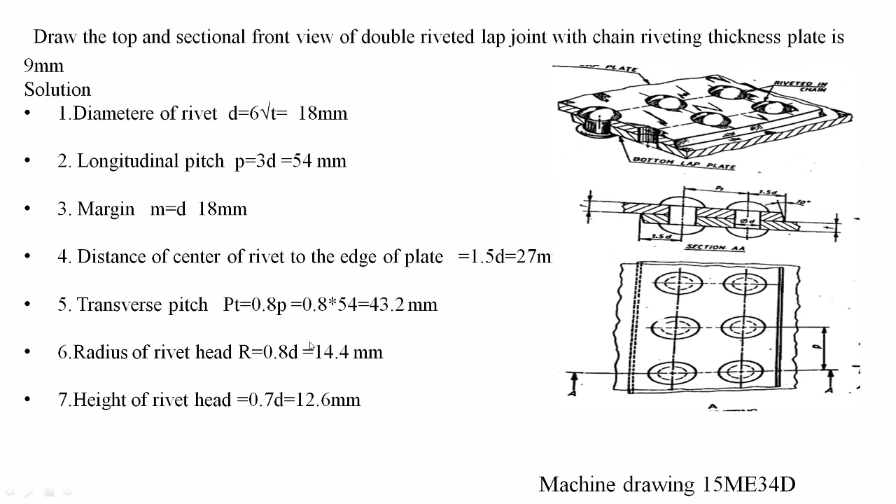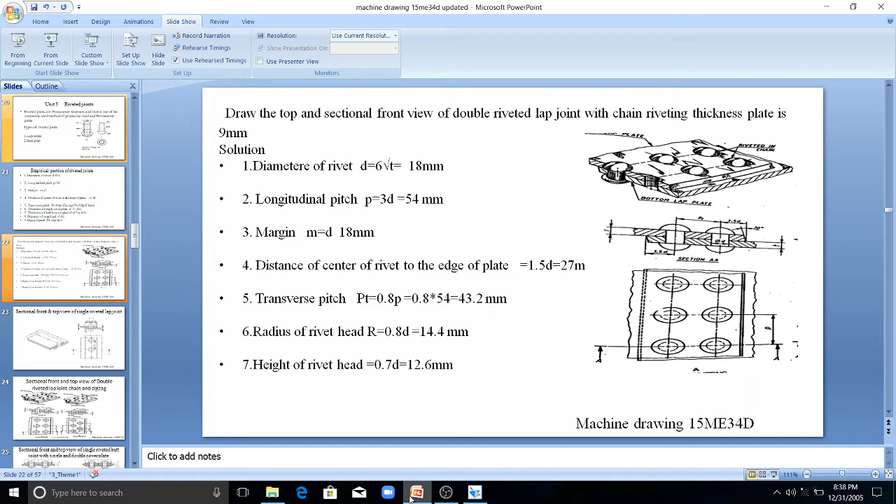So I'll start with the center line. Now I have to draw another center for the second rivet. The distance between these two centers is PT, that is 43.2 millimeters. So I have to draw the other center at a distance of 43.2 millimeter from this line.

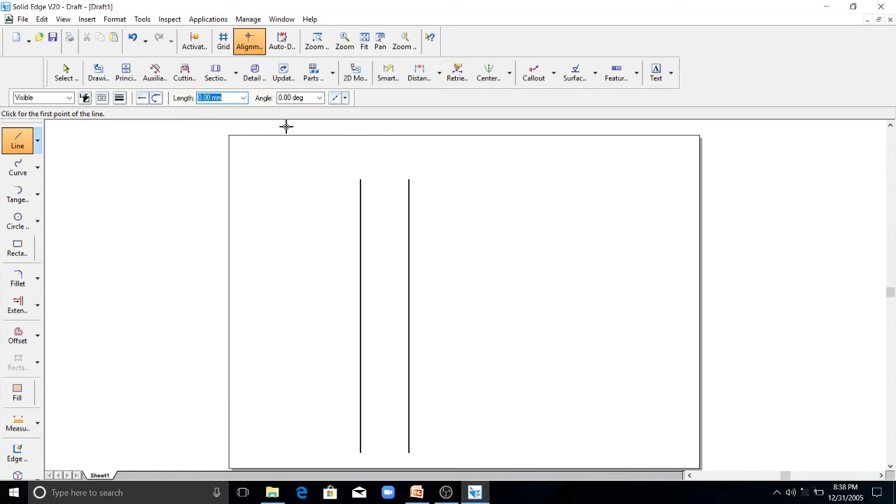Now I will draw the two plates. The thickness of the plate is given as 9 millimeter, so I have to draw two plates of thickness 9 millimeter.

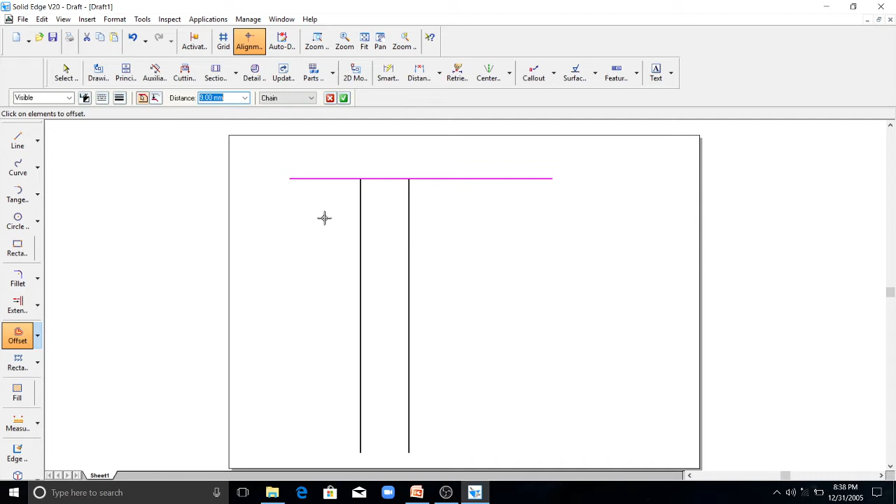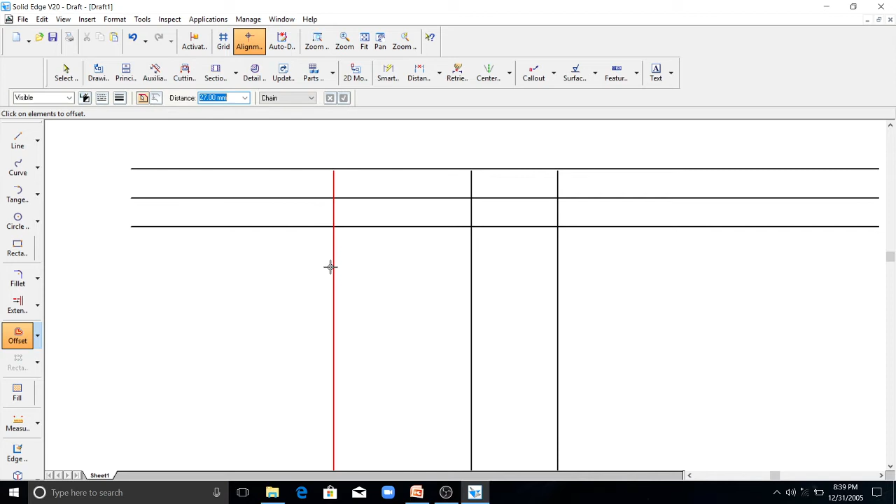Now I have to draw a distance of 1.5 D, that is 27 millimeter. This is the center distance from the center of the rivet to the edge of the plate from both sides, you can see here. So to draw a line at a distance of 1.5 D, it is 27 millimeter from this line. This side - so this is the 1.5 D distance.

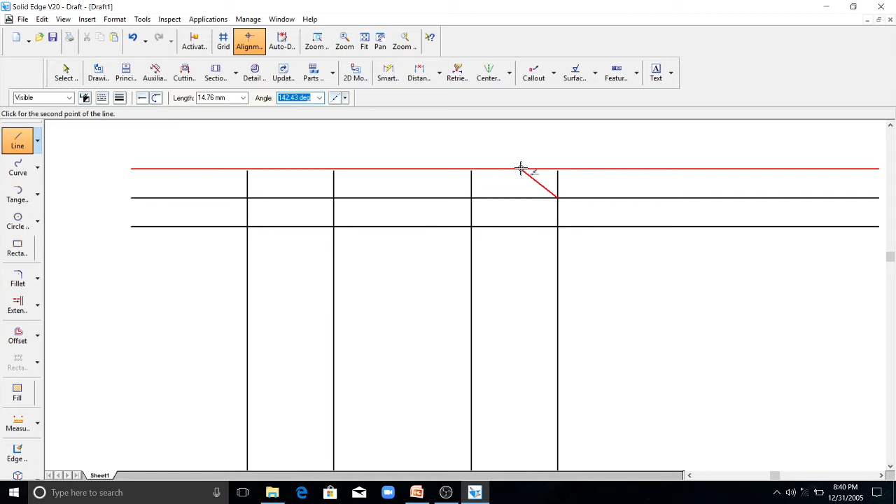Now you have to draw the 10-degree taper line. You can see here this 10-degree taper line from both sides here. So 10-degree taper here, similarly 10-degree taper on the bottom side. So the remaining portion you have to erase it.

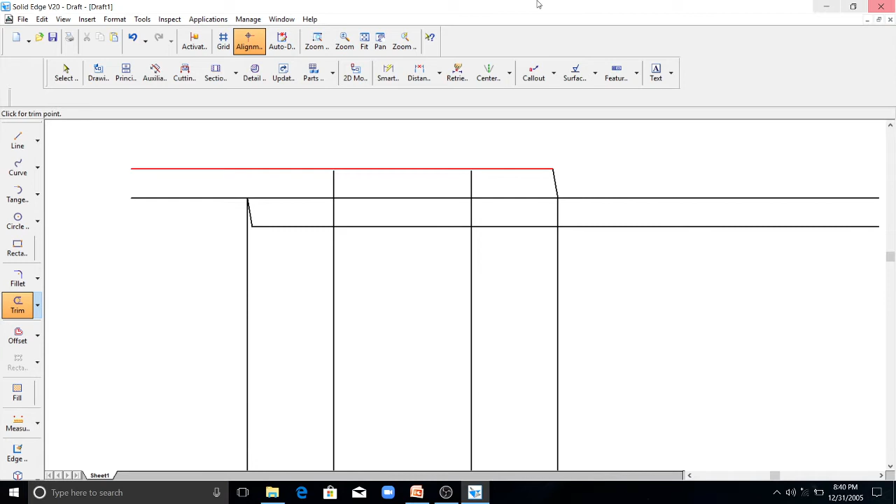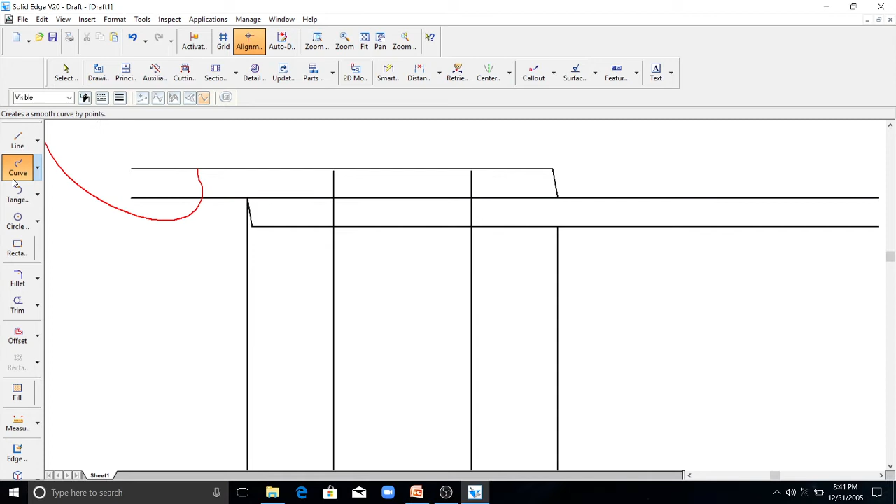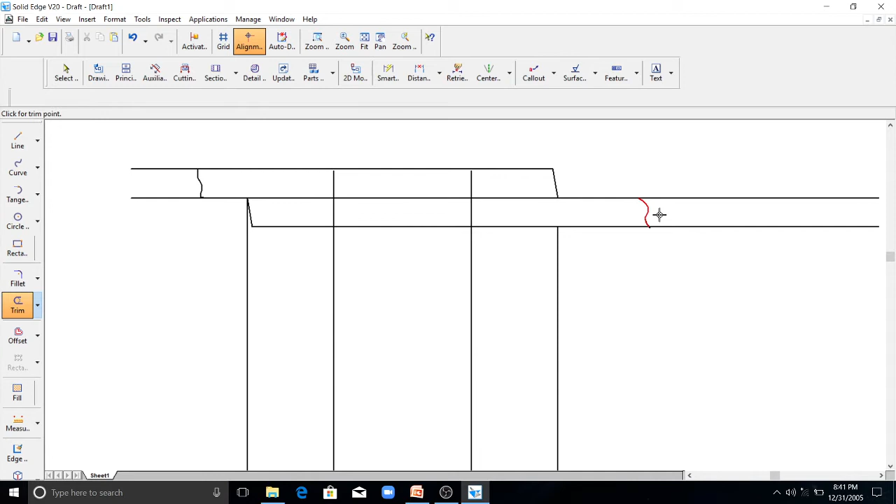This length you can draw for any dimension, it doesn't have any particular dimension. Similarly, this length also you can draw for any length. The remaining portion you erase it.

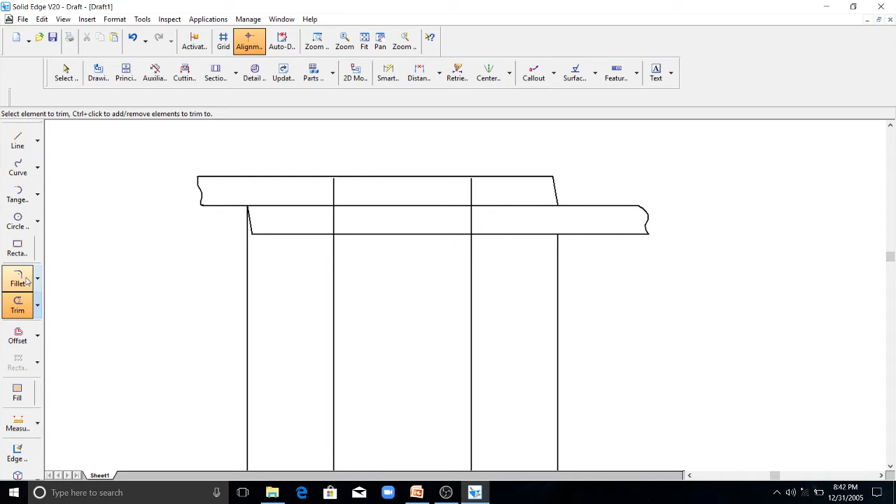Now I'll draw the diameter of the rivet, that is 18 millimeter. So 9 millimeter from the center. Similarly, here also 9 millimeter.

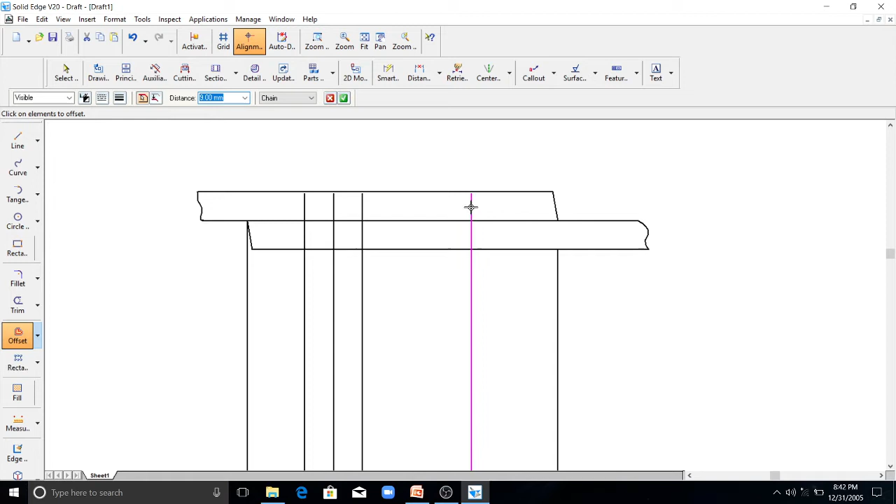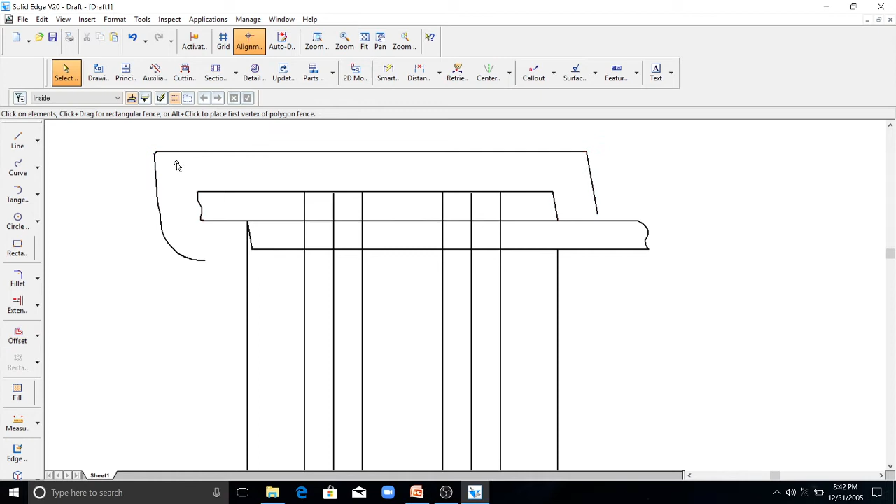Now you have to take a distance, the height of the snap head, given as 12.6 millimeter. So take a distance of 12.6 millimeter - this is the height for the snap head. Similarly you have to take the radius of the snap head, distance 14.4 millimeter. So from this center, 14.4 millimeter you have to take.

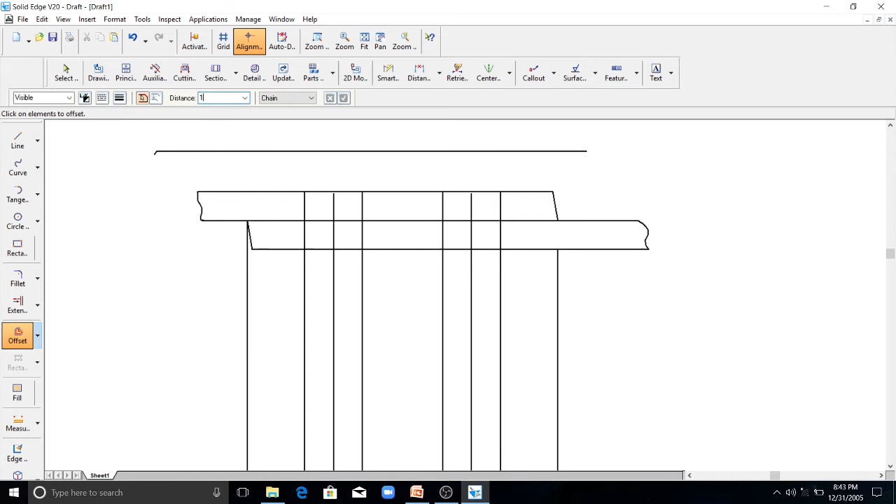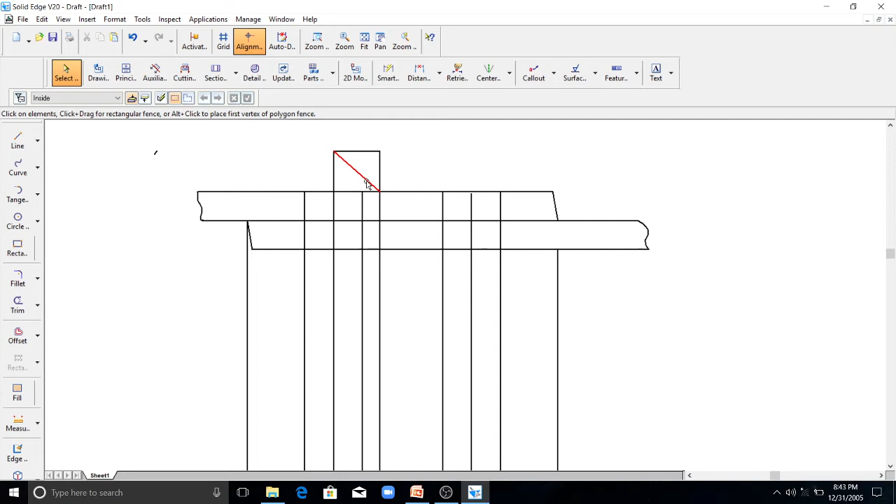Now extend this line, this center line. Now you have to draw a line from this diagonal to this diagonal. So in order to draw the diameter of the snap head, you need to bisect this line, and this bisector should extend till it touches the center of the rivet. So bisect this line first. This is the bisector of this line.

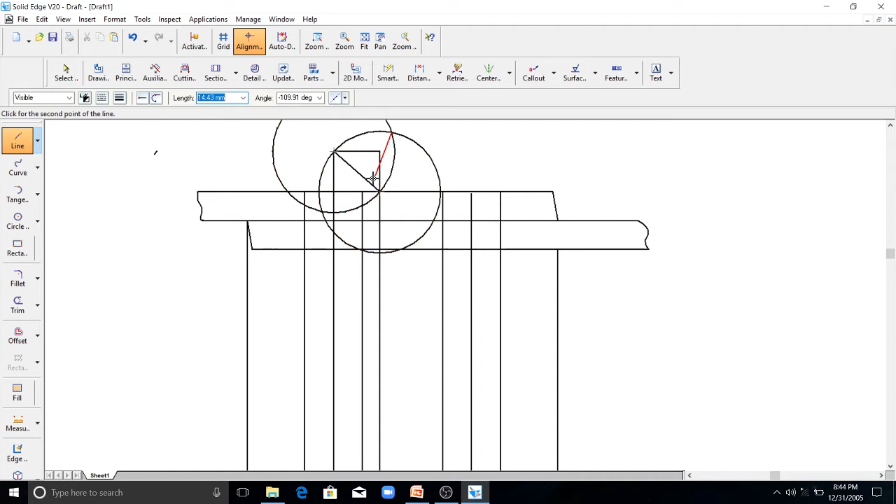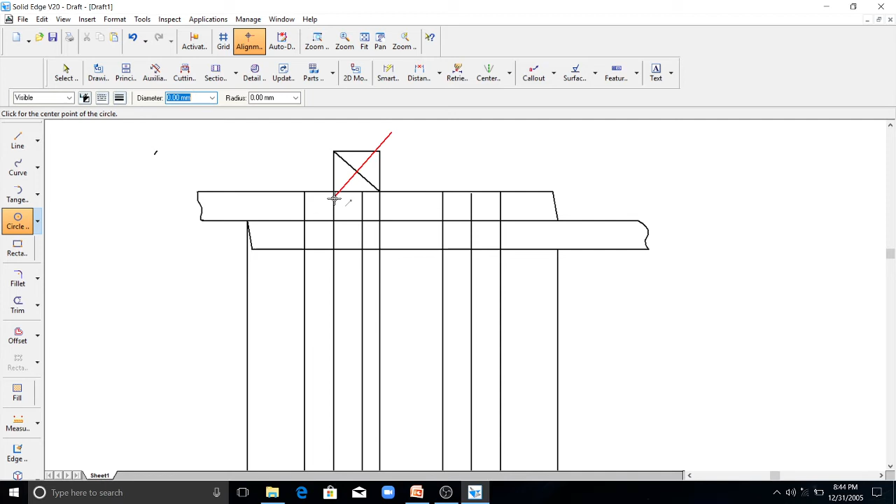So this bisector you need to extend till it touches the center of this rivet, and the remaining portion you trim it. So already it is extended - this is the center, the center to draw the diameter of the snap head, or the radius of the snap head. So from this center, draw an arc of radius equal to 14.4 millimeter.

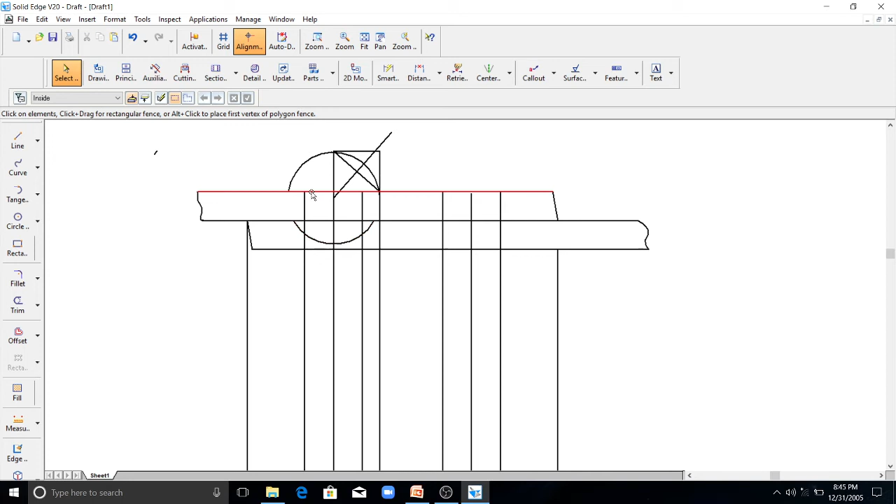So this is the procedure to draw the snap head. Similarly, you have to draw the bottom portion of the snap head. Instead of drawing these things again, you can use a simple technique: since this radius remains the same in the bottom portion, you just need a center here. For that, measure the distance from this line to this center.

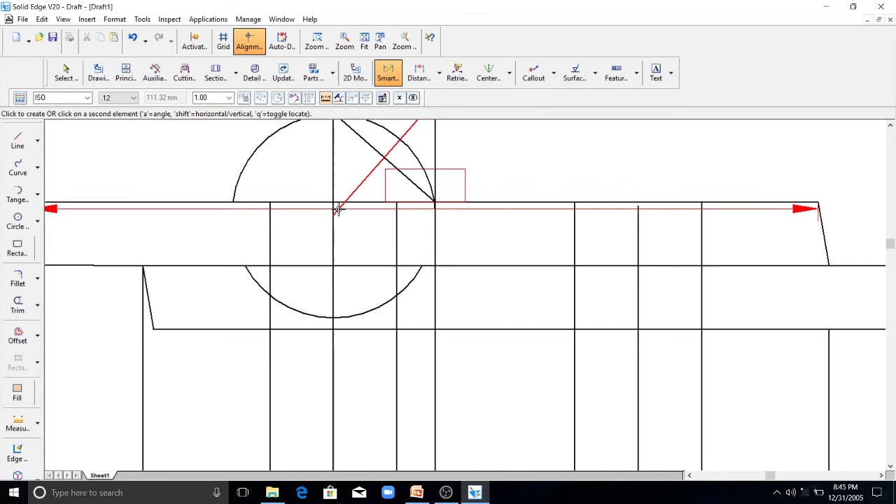Measure the vertical distance, that is 1.93, and from this center, with this line, you leave a gap of 1.93 here, so you will get a new center to draw the bottom portion of the snap head. So 1.93 mm.

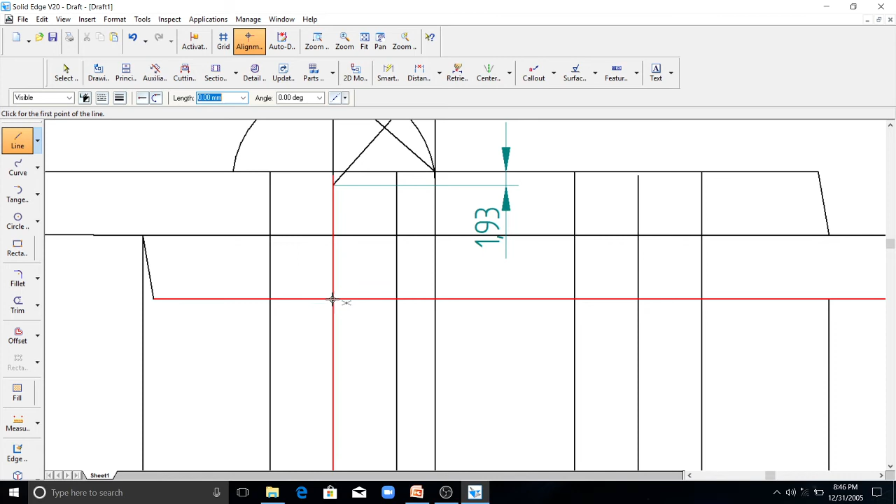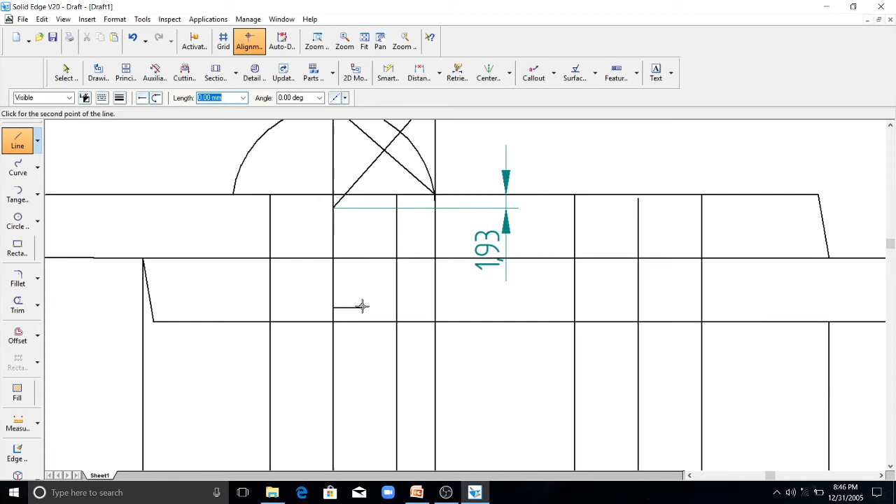So instead of drawing these things, I am telling the simple technique: just copy this distance here and leave that distance here, so you'll get a new center for drawing the bottom portion of the snap head. The radius remains same, that is 0.8d, so 1.93 from this line inside. You draw a radius arc of radius equals to 14.4 mm. So this is the procedure to draw the bottom portion.

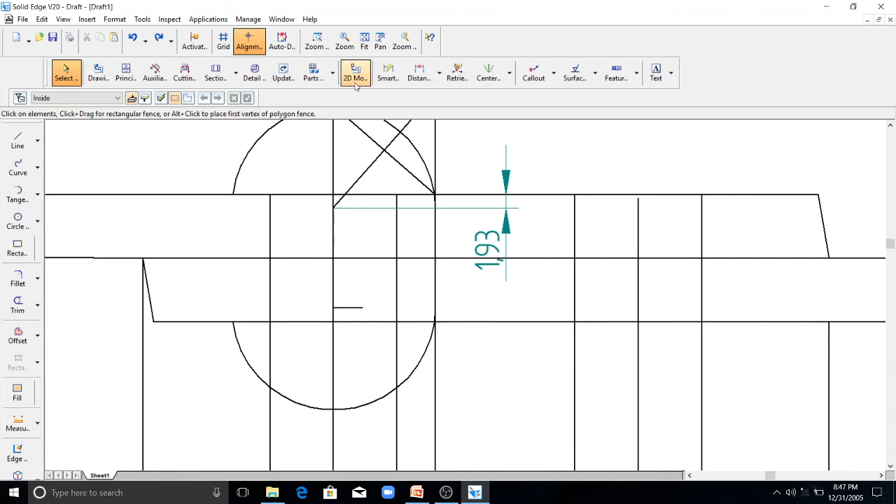Similarly, you have to draw the snap head in the second rivet. Instead of doing the same things again, you can copy this center to this line, because these two rivets are of the same dimension. Again, no need to draw these lines again and again. Just simply copy this center here to this center here, and similarly this center.

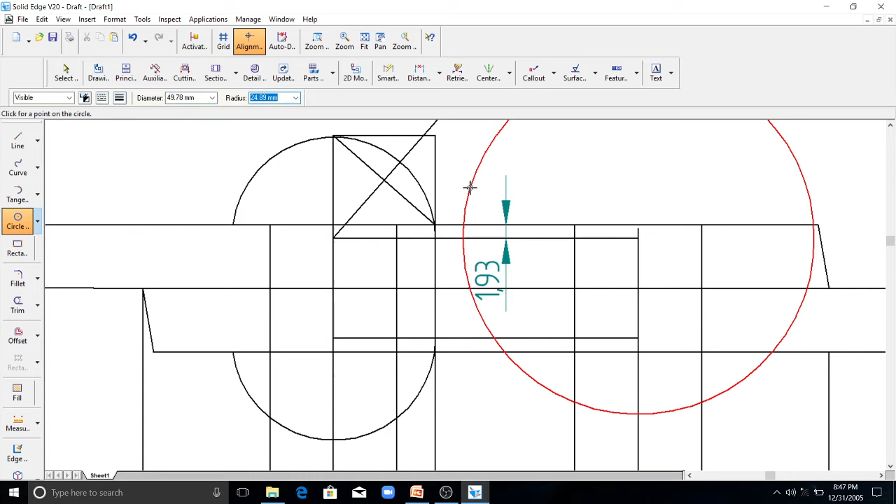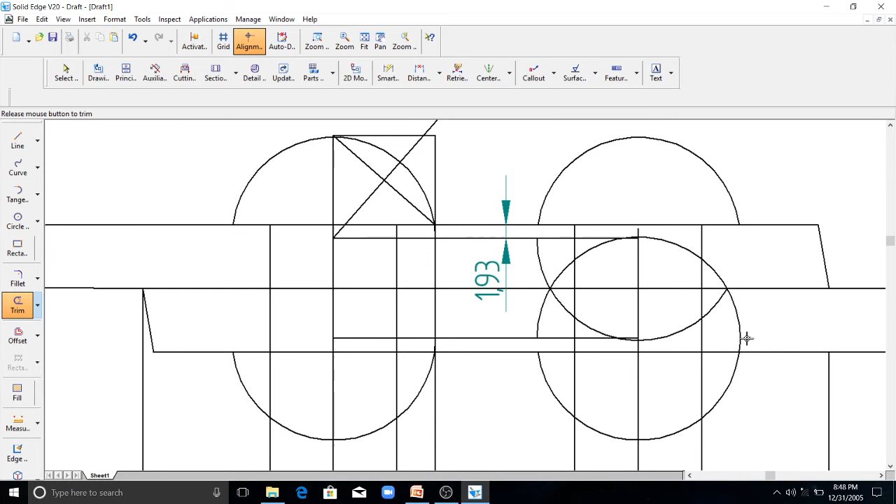Simply draw the arc of radius equals to 14.4 millimeter. Here, new center, radius equals to 14.4 millimeter. The remaining portion we erase in order to avoid confusion, so everything you erase so that there will be no confusion.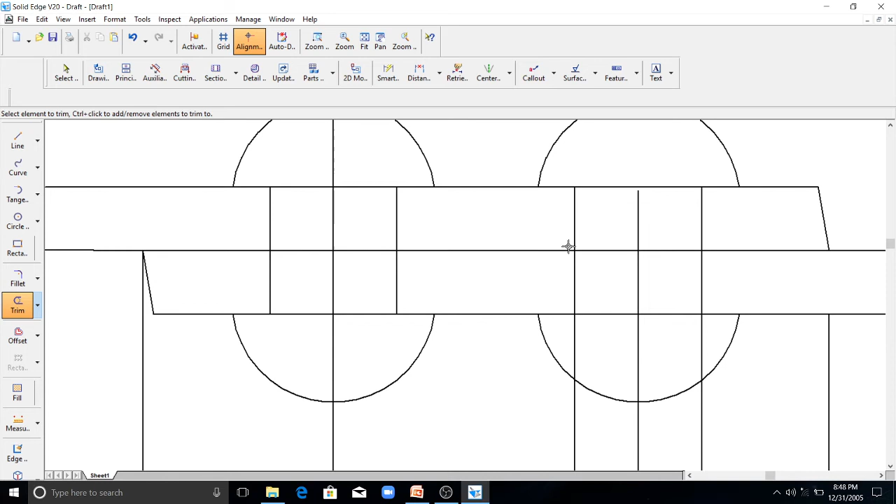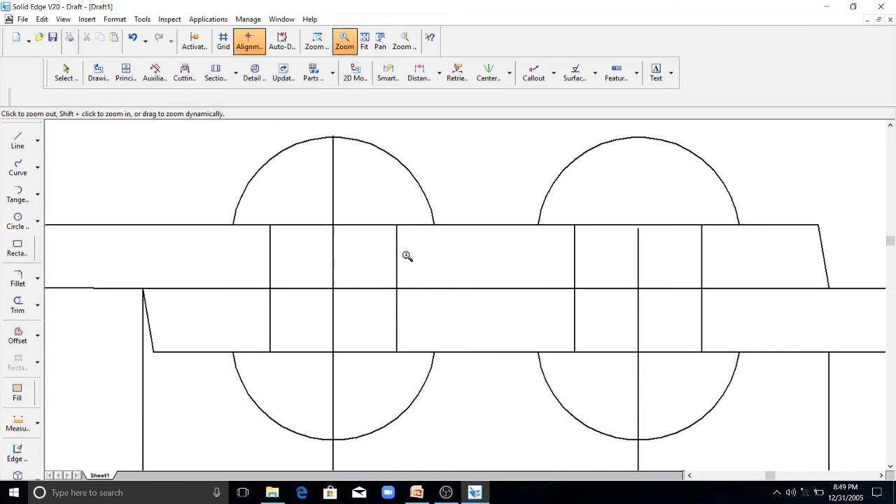How I have drawn the front view: you section it. Since there are two plates, you have to section it at a different angle. This is one plate, and the bottom plate you have to make at another angle. So these are two plates, and this completes the sectional front view.

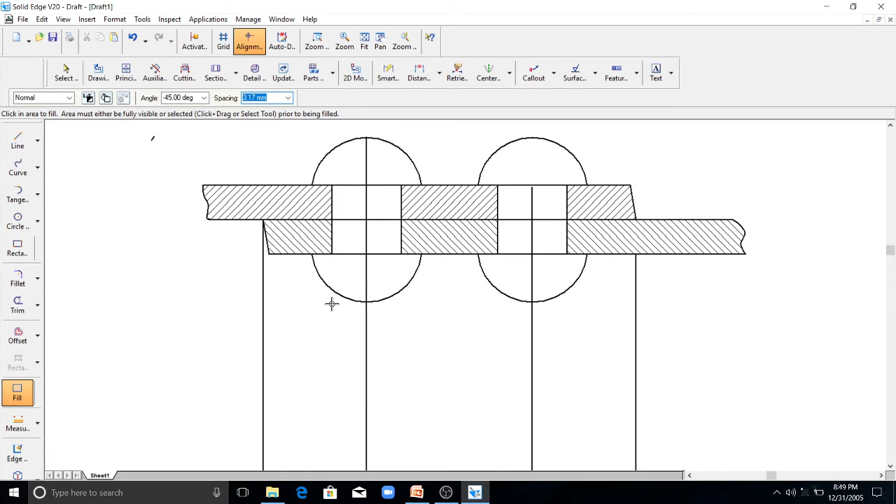Now you have to concentrate on drawing the top view. You can start the top view with any line; there is no particular distance here, so you can start anywhere. I will start with this center. In the top view, you can see the diameter of the snap head first. This diameter of the rivet you cannot see because it is overcome by the snap head—the snap head comes in front of the rivet head.

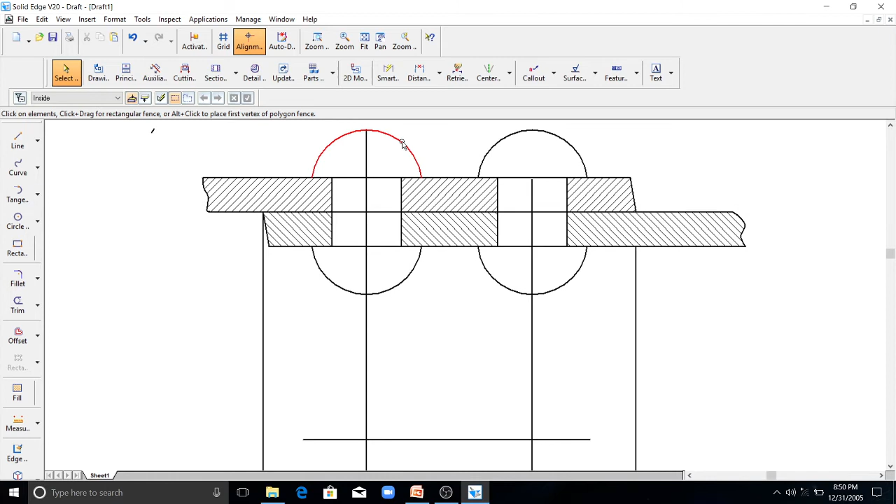So you cannot see it, so you have to draw this diameter of the rivet in dotted lines. You can see two circles: the first circle is of the snap head diameter, another circle is of the diameter of the rivet. This diameter of the rivet is invisible, so you have to draw it in a dotted line. So this is the first center.

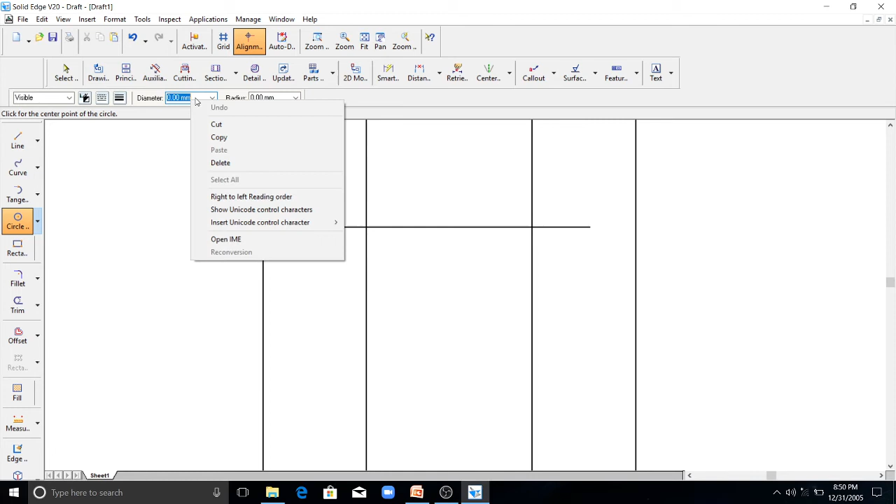The distance between the two centers you can see here, that is pitch P, which we got as 54 millimeter. So the distance from this center to this center is 54, and from here to here also 54 millimeter, that is pitch P. You draw three lines, three centers, at a distance of 54 millimeter from this first center. So another center here, 54. So you got all three centers here.

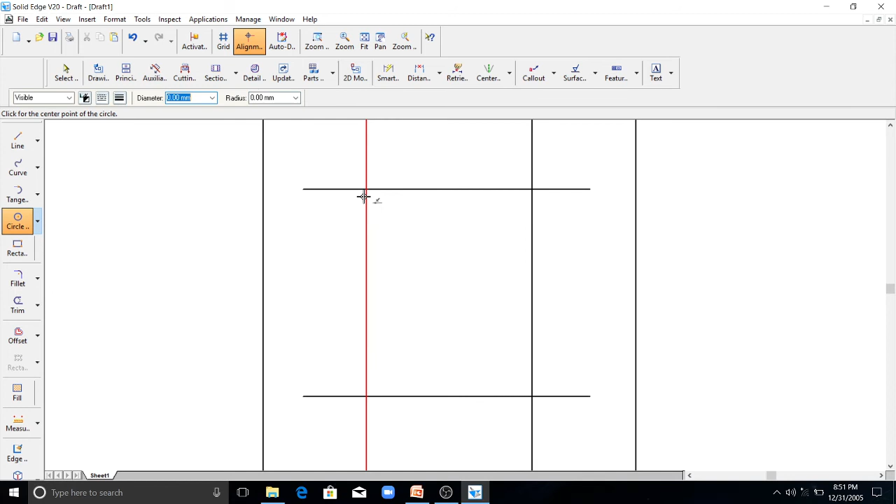In every center you have to draw two circles: first of diameter 18 millimeter, for all centers, and another circle of snap head diameter.

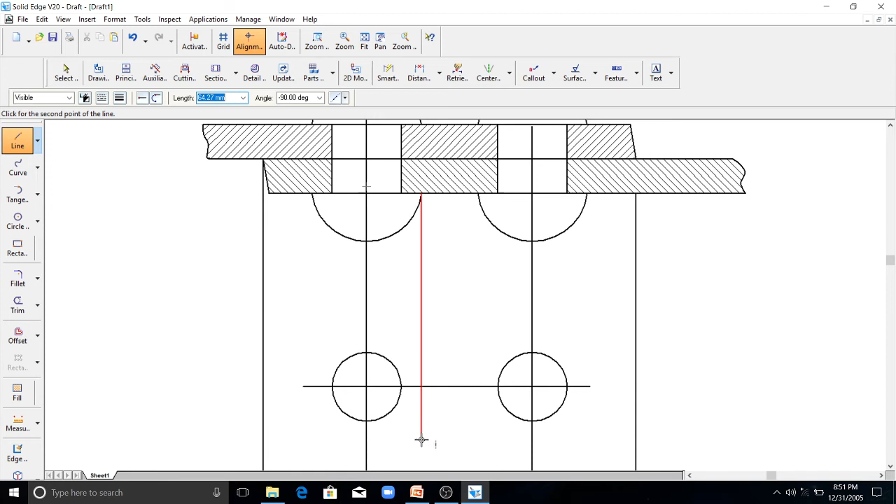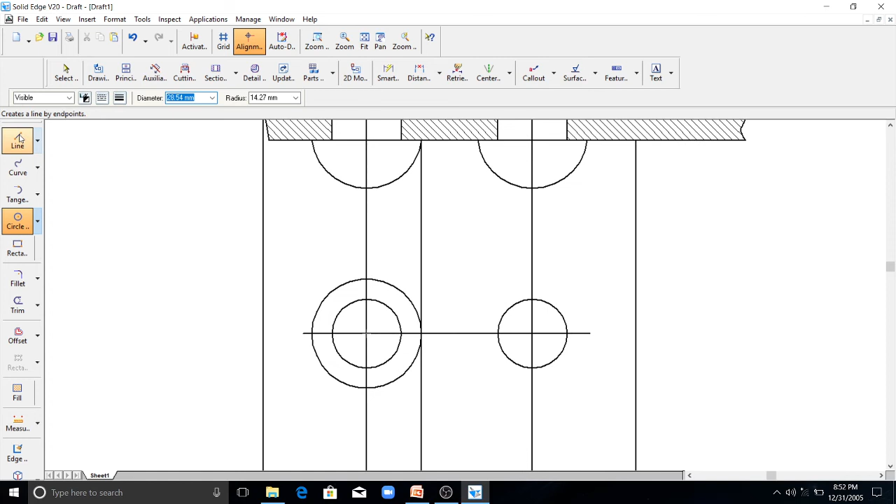We don't know that particular dimension, so you have to extend it. Now draw another circle of the diameter of this projection line here. Similarly, draw the snap head diameter circle here.

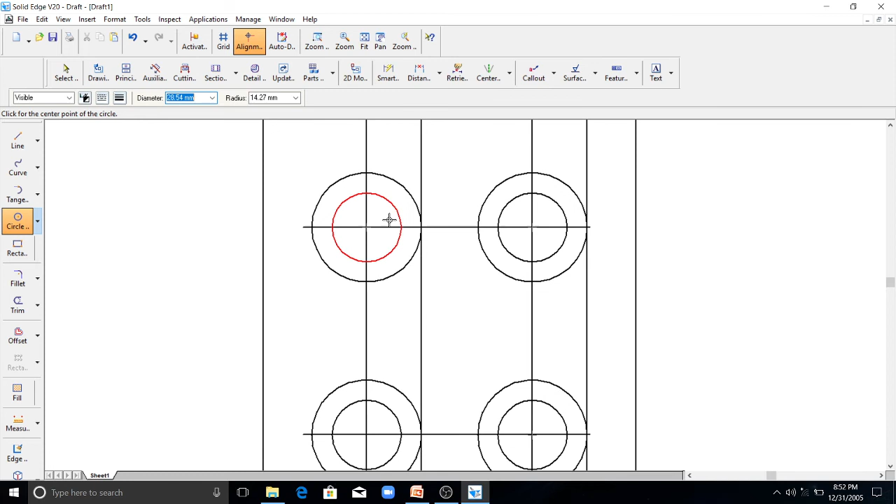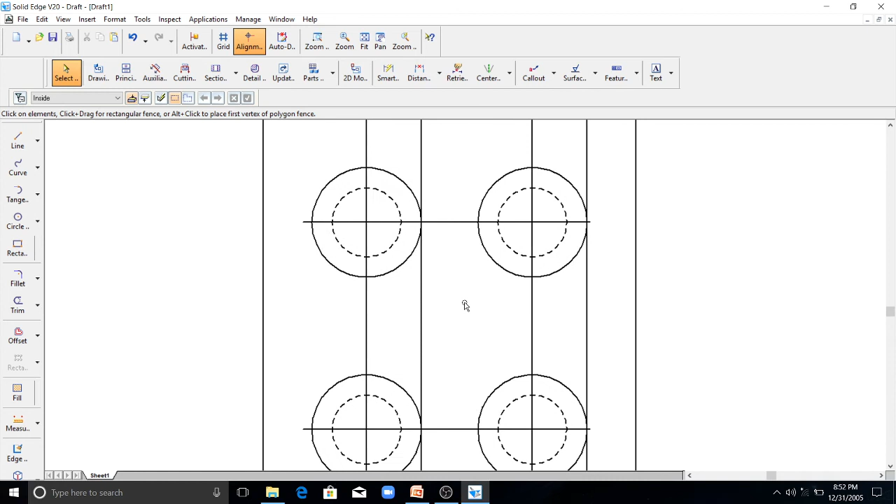So the inside circle you have to make as dotted because it is invisible. This finishes the top view.

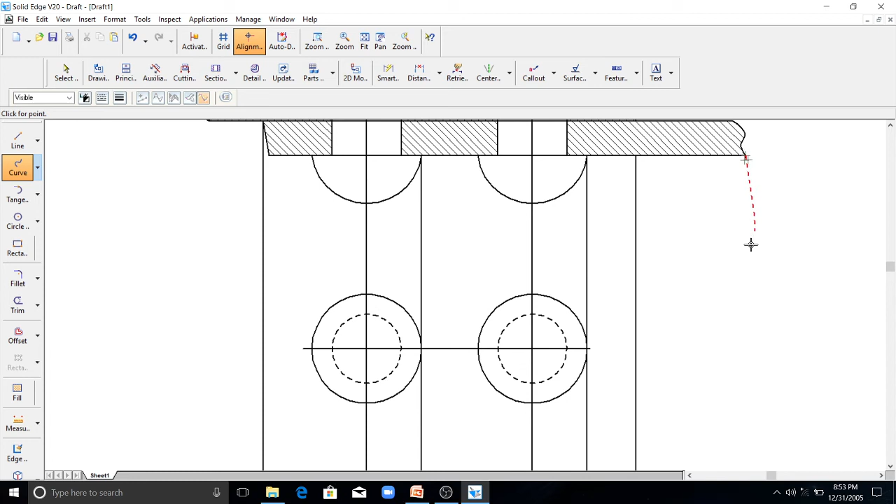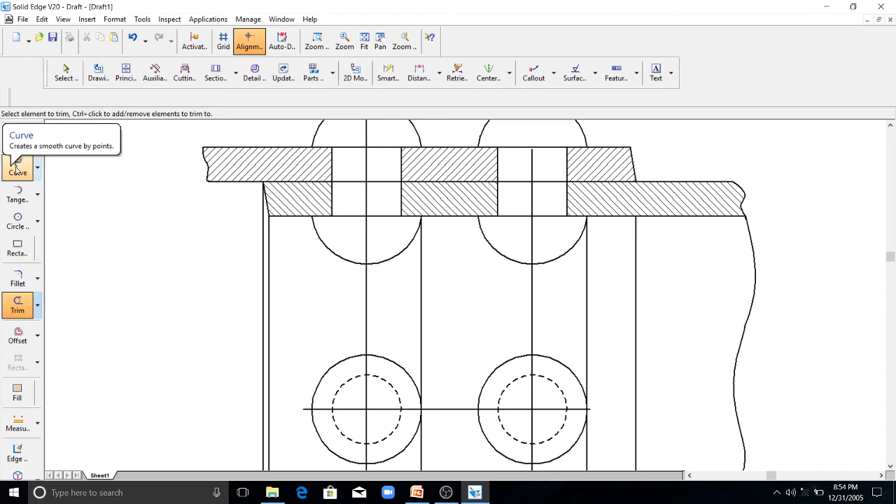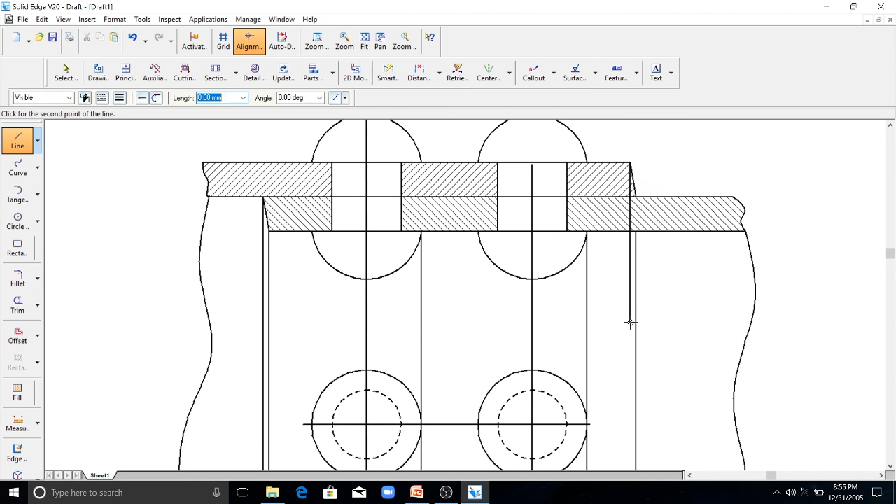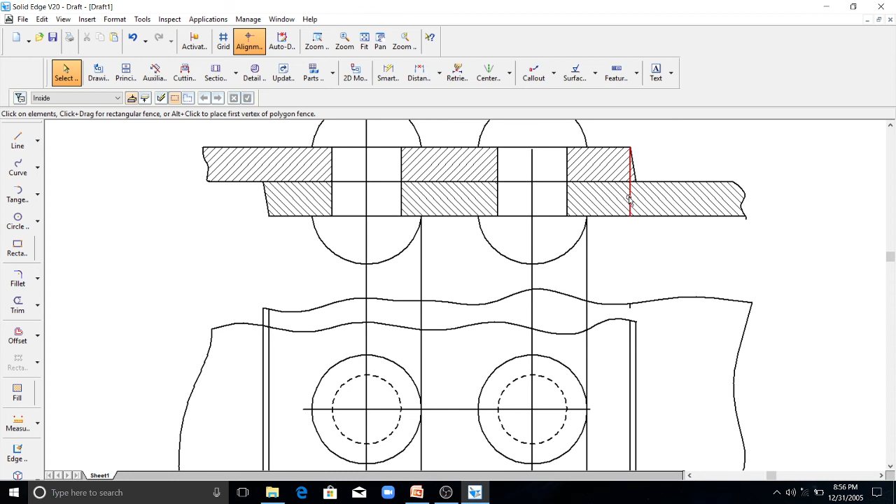Just need to finish the cover, the plate here. This completes the front view.

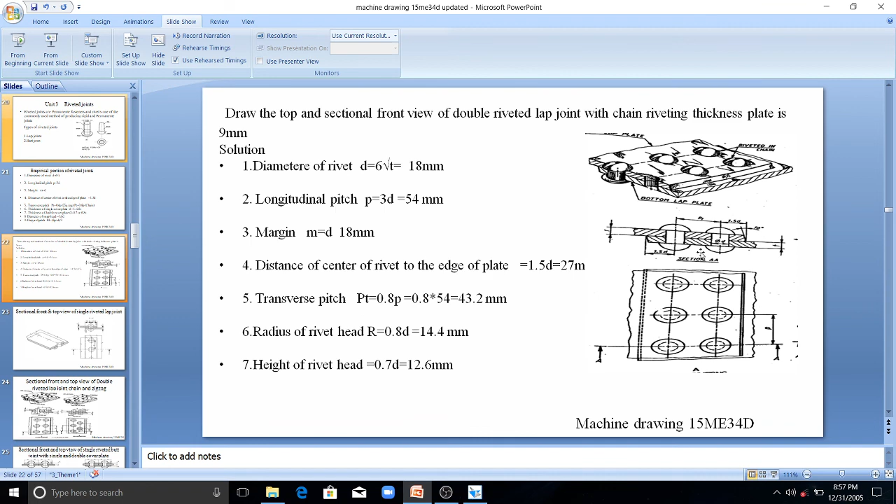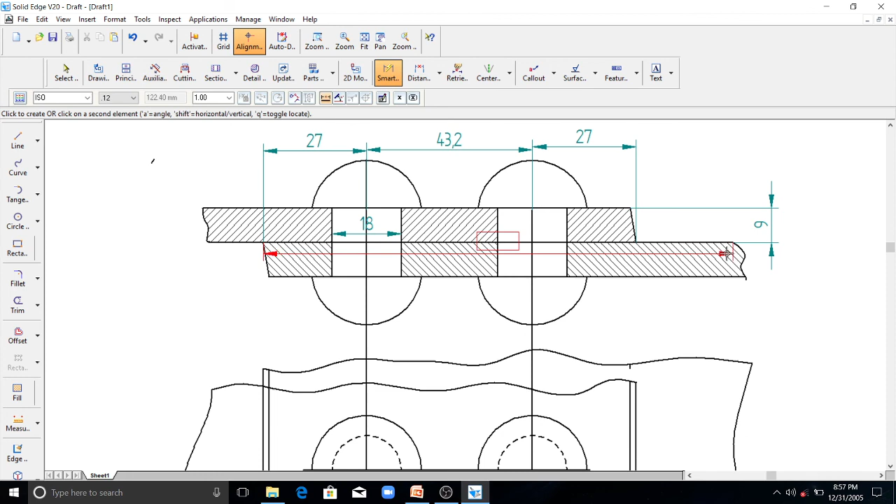If you measure the dimensions here, this is the dimension. This dimension is PT, it is 43.2 millimeter—you can see here, we got it as 43.2 millimeter. This is the PT distance, and 1.5D is 27 millimeter. So this is the distance from this line to here, just 27. Similarly this line is set as 27 millimeter, and the diameter of the rivet is 18 millimeters. Similarly, the thickness of the plate is 9 millimeter, and this dimension is also 9 millimeter, and the pitch P between these two centers is 54 millimeter.

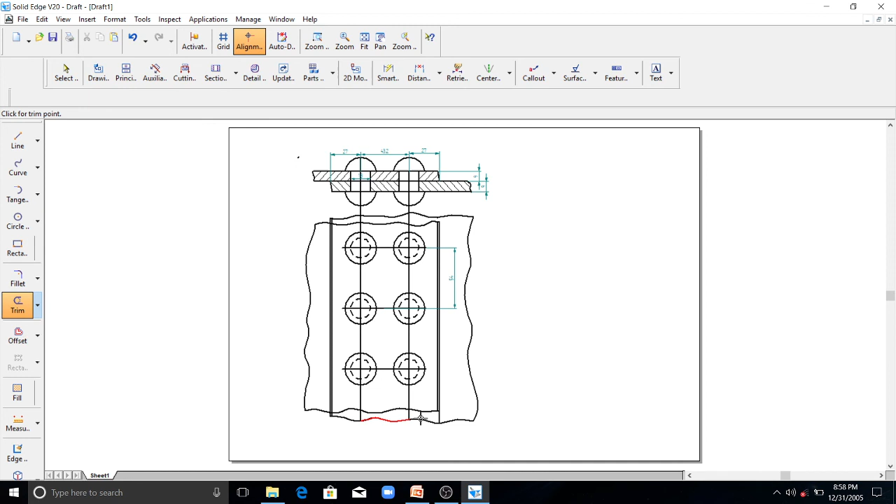So these are some important dimensions. This is the solution for the double riveted lap joint. So this is about the double riveted lap joint, you can see here.